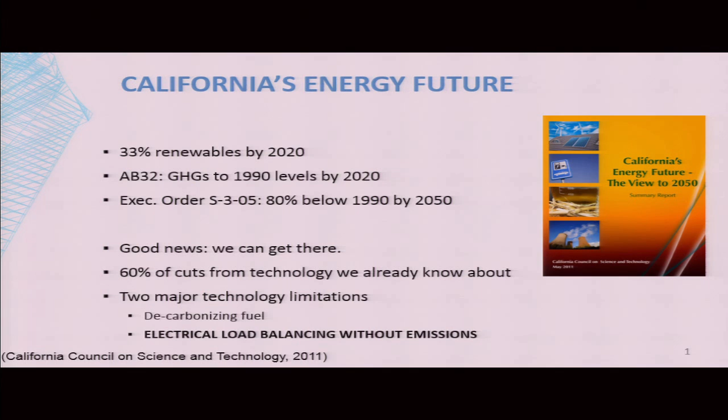So how do we get there? Right now the grid tends to be composed of baseline and dispatchable sources. Baseline sources don't generally turn off, things like coal plants and nuclear plants that produce a constant amount of energy, and it's very expensive to turn them off. Dispatchable sources are things you can turn on and off and control their generation to change the amount of electricity produced, generally things like natural gas plants.

On the load side, you have oblivious loads, things operating on their own control loops or when people request them on demand. All of our industrial, commercial, and residential loads generally fall into this oblivious case where they're just consuming based on a pattern. The communication generally goes one way, in that the grid is just looking at what the loads are consuming, predicting that, and changing its set of generation accordingly.

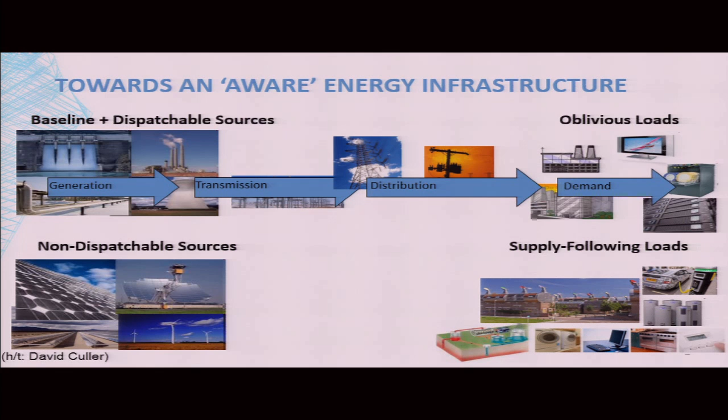So what's changing? As we add a lot more of these non-dispatchable sources—things that aren't able to be directly controlled, so you can't control how much the sun shines or the wind blows, you can just turn them off or on basically—as these become more prevalent on the grid, you get larger fluctuations on the supply side. So there are a few ways to deal with that, but what we propose is a new class of loads called supply-following loads: loads that alter their consumption via communication with the grid, and communication from the grid, in order to decide how they should alter their consumption.

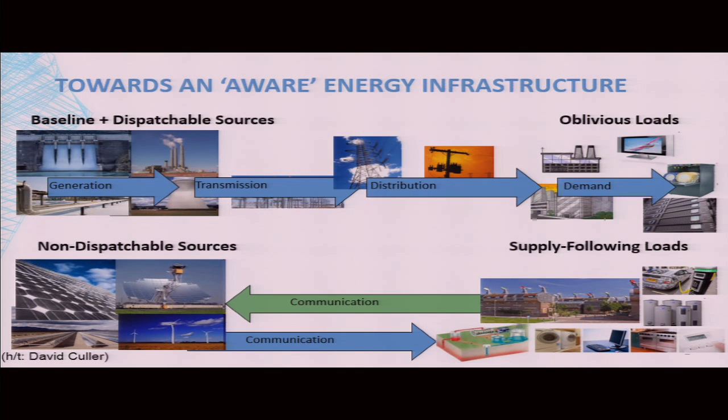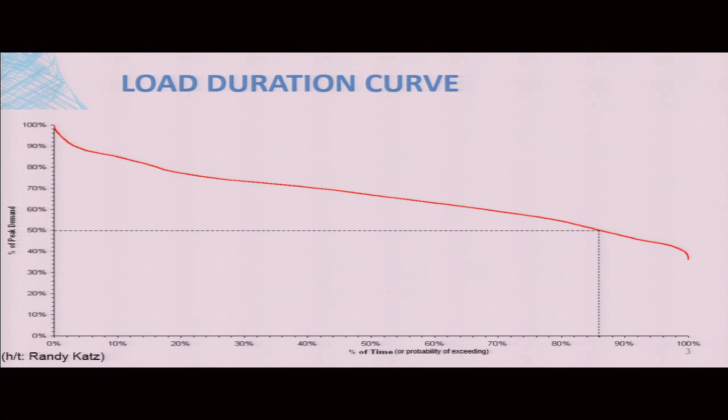What's striking about this load duration curve is that at the top there's a pretty nasty peak. This peak is saying that for a very small number of hours of the year, you're using resources that aren't used any other time during the year. If you break down the types of sources used, those tend to be peaker plants, which are generally the most expensive to operate—otherwise you'd use them at other points on the grid. They tend to have the highest emissions, and they tend to be the lowest capital expenditure but highest operating expenditure for utilities.

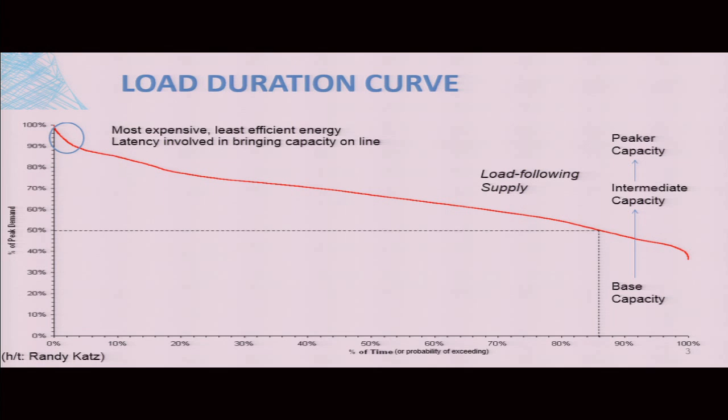So that's why they maintain their role as peaker capacity. It's said that utilities generally spend somewhere on the order of 10% of their generation capital on providing this last 1% of load right at the very peak. So it's a very inefficient part of the curve.

So how is this generally dealt with? There's the field of demand response, documented in I4Energy talks, and there's a great research center at LBL doing fantastic work. Their goal is to essentially incentivize reduced loads during times of peak demand. They try to get consumers of electricity—generally large consumers they can phone up, or increasingly automatic ways to do this at scale—to cut demand at those peak times. In California, these times tend to occur in the middle of summer when there's cooling load from air conditioning in the Central Valley.

Beyond that is demand-side management. This is essentially trying to shift demand not just at these peaks, but also to other places on the duration curve. So it's not just trying to curtail like demand response does, but it's actually trying to relocate that demand.

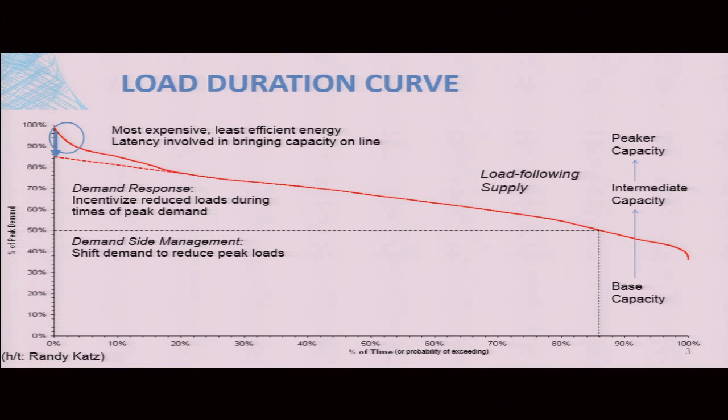And then the set of techniques we're espousing here is supply following—actually having collections of loads that are able to alter their consumption based on a few different characteristics. You look specifically at power proportionality of the loads, how much they're able to change their consumption to reflect the actual work done, as well as exploiting the slack in their load profiles—how flexible the loads are in order to shift and schedule consumption to make this duration curve a little more tractable for a utility to manage.

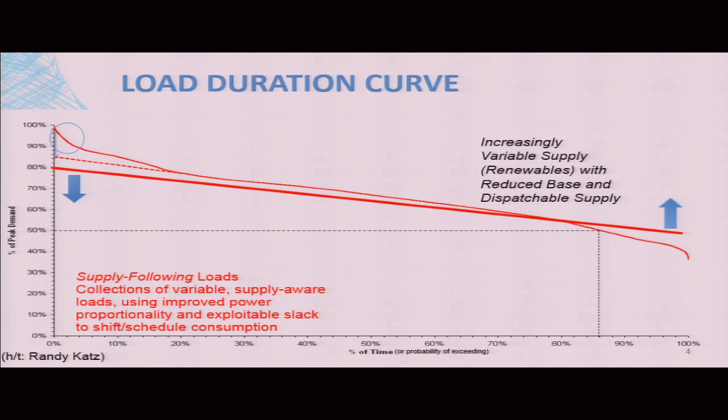So the idea with supply following is that you're not just trying to cut off the peak, you're actually trying to relocate that consumption to elsewhere. You're essentially tipping the balance of this curve so that the energy still gets consumed, but it gets consumed elsewhere. That's where it's different from things like energy efficiency.

One, we'll talk about to what extent supply-following loads can actually help the match between supply and demand. And the other is, how can we actually make existing loads become supply-following? How can we alter loads' consumption patterns to have this nice quality? The other questions I'll address, but only tangentially—if you want answers to those, you'll need to read the dissertation to find out.

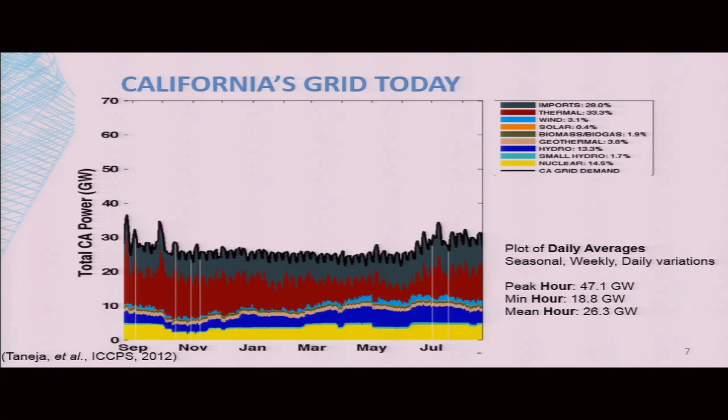So how does this compare to other electricity grids? In the dissertation, I look at three different grids. I look at Germany, which has a far more renewable grid than California does nowadays - it's already at 22% renewable as compared to around 10% for California. But it also uses about 44% coal.

This chart represents the German grid. The top category is actually everything besides wind and solar, so that's not represented on this chart. In Germany, the reason for some of this is that solar has actually been heavily subsidized by the government, and what that results in is that 50% of the renewable investment actually goes to about 20% of the renewable energy - that's the solar portion of the grid, to much consternation of other renewables stakeholders in Germany. As well, Germany has some other considerations like a nuclear phase-out that they're planning to finish by 2022, which will exacerbate the need for, in addition to renewables, techniques to manage those renewables.

Another grid we looked at was Ontario. Ontario is actually quite a different situation because they already have primarily carbon-free generation. They get 78% of their generation from hydro and nuclear sources, and only a small remaining 3% from about a gigawatt and a half of wind capacity. There's no utility-scale solar in Ontario. So one of the things I'm answering is how these decisions came about and whether they make sense from an energy perspective, regardless of the actual policy concerned, for example, not having any utility-scale solar.

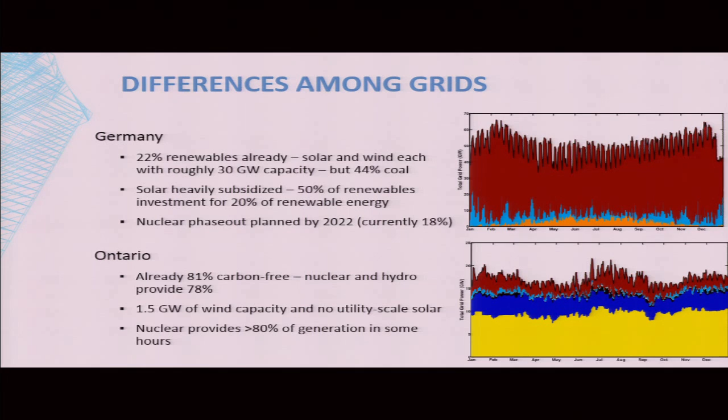That's important because if you're able to make other loads more efficient, or you have to cut back, or try to increase your nuclear proportion, you might have times where it's required that you turn off nuclear plants. That's very bad for the operation model of nuclear plants and for the economics. So what we might see as we get rid of remaining fossil fuels on this grid is quite a change in its generation mix.

So we'll drill into California to understand some implications of going to higher levels of renewables. The experiment we wanted to undertake was looking at renewables in the behavior of the electricity grid at a far more renewable level—not just the 33% we're looking at in 2020, but going well beyond that. So we targeted 60%, and the reason for 60% is that's when you start to see really interesting behavior.

We also see that the importance of techniques like demand response, demand-side management, and supply-following loads really increases as the penetration goes up. So we aim to look at a grid that was 60% renewable.

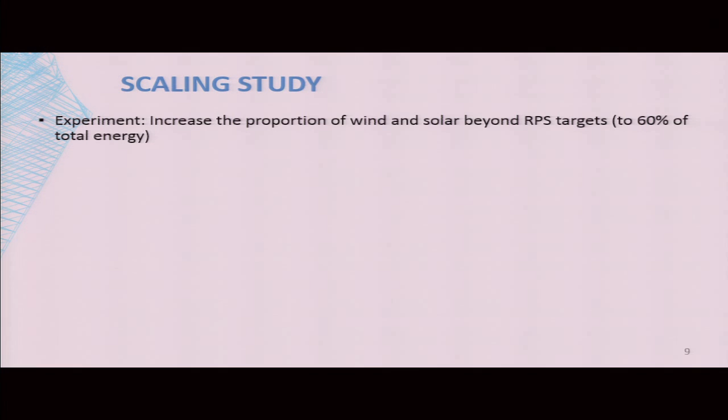In order to do a study like this, we had to make a number of assumptions. Among those, we maintain the existing population of wind and solar facilities, and we scale up their generation proportionally. What that essentially does is maintain the same temporal and weather patterns that affect production. To size them, we figure out what size we'd need for a specific proportion of renewable energy, then try to minimize the total capacity of resources needed to get there—essentially attempting to minimize the cost of achieving 60% renewables.

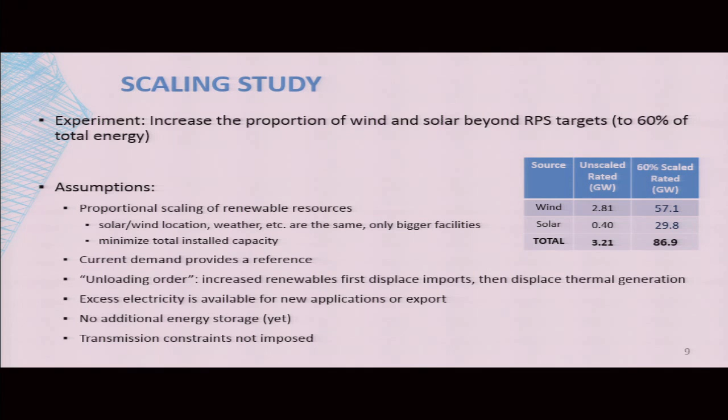As we increase renewables, we're also displacing other energy sources. The order we've chosen is to first displace imported energy, then displace thermal natural gas generation. So at times when there's renewable electricity production beyond the reference demand from our current demand, we have excess electricity—you'll see in the next chart how that operates. We're not considering any additional energy storage beyond what's on the grid now, and we're not worrying about transmission constraints at this stage of the study.

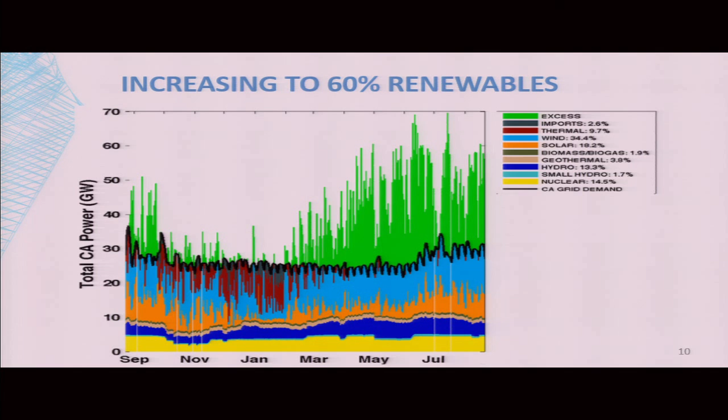This is the same chart I showed you earlier for the current California grid, but notice how this changes as we ramp up to 60% renewable. We've really increased solar and wind, going from about 3.2 gigawatts to about 87 gigawatts of capacity. We've displaced a lot of the thermal and imported generation, now somewhere around 10 or 11%. We didn't alter hydro, nuclear, and other baseload elements in this analysis.

A few things jump out immediately from this graph. Right now we're operating mostly concerned about summer in the current grid today, because that's when our peak load occurs and we need to use the most resources. In this situation, that's no longer the case—we no longer have that cooling crunch in the middle of summer when everyone turns on air conditioners, because just as nature intended, that's when energy is most abundant. That's when the sun is shining brightest, there's a lot of wind energy available, and we have copious amounts of excess.

At the same time, winter becomes the toughest in this scenario, because the change in available energy from the environment is much larger than the change shown in demand. We actually end up using a lot of our fuel reserves in winter—turning on natural gas plants and aggressively using fuel resources. But on the periphery, in these shoulder seasons, we have intermittent excess and deficit where we could use load shifting and supply shifting techniques to address being excess in the middle of the day and deficit at night.

So what does that actually look like?

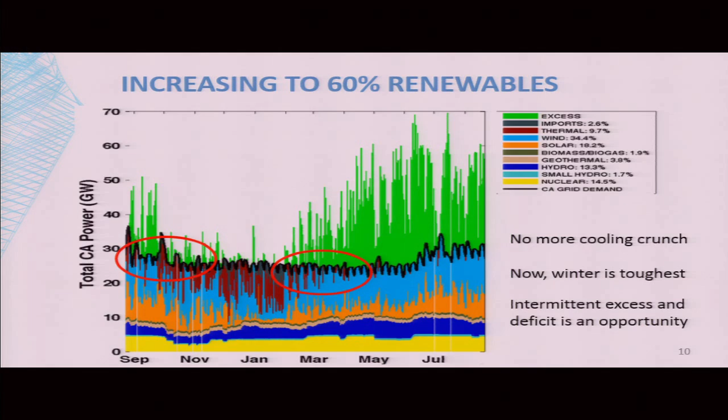This is a 5-day period in the autumn season, and it shows that pattern I just described of having excess in the middle of the day when there's a lot of solar electricity available, and then deficit in the middle of the night. You can see that at some points, like on this third day, there's quite a bit of deficit that we end up dipping into our thermal resource as well as our imported resource in order to meet demand, this reference black demand.

So how could we imagine dealing with this and trying to improve the match between supply and demand, as well as cut down on emissions?

First we could imagine using some of our supply-side resources. We see this hydro resource, this blue resource here at the bottom, and its current management results in it generally matching the overall demand curve, this black line. The shape of it is very similar to the hydro, and that's a reflection of how these resources are managed now. We can imagine that since our goal is no longer to match demand, because we have excesses at some times, it could be an altered goal to try and displace our fossil fuel needs at other times of day. So we can imagine managing this resource differently, and I'll come back to that later.

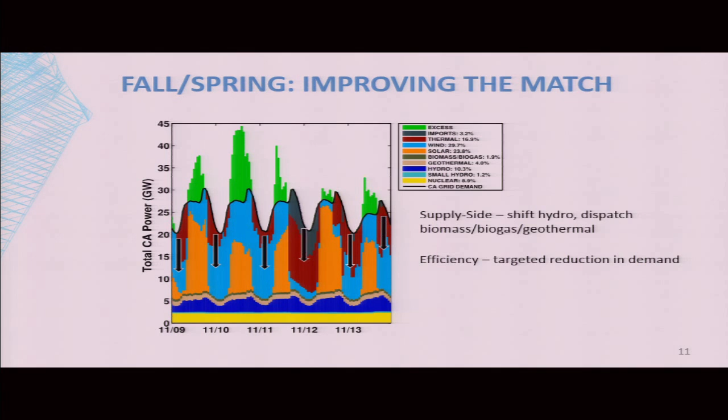Another solution we can imagine is targeting our efficiency. There's all sorts of work going on in energy efficiency. It's an age-old topic, and it's one that is critically important to improving this match, but we can target which types of energy efficiency we perform. What classes of loads make sense? Which loads are the ones that are consuming energy in these times of deficit?

Next, we can imagine utility-scale energy storage, and this is one that has been held up for a long time, and there's lots of great research on the topic, but it still hasn't grown to large utility scale yet. Essentially what you're doing is you're shifting periods of excess supply into times where you might have deficits. So you can imagine taking each of these green excess peaks and pushing them down into the valleys when we're using fossil fuels otherwise, with large reservoirs of storage.

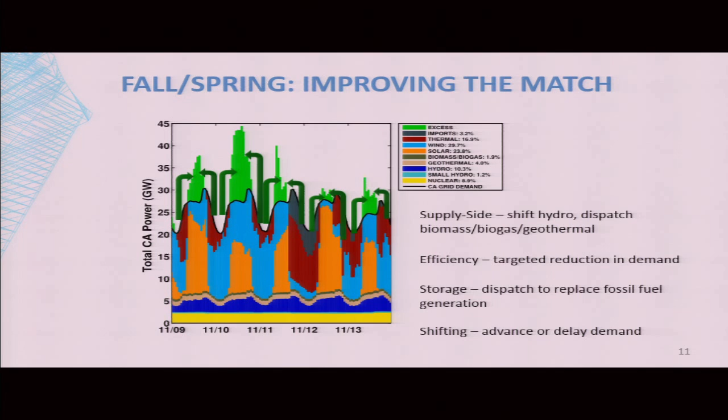And last, you can imagine energy shifting. The value here is you can actually shift in both directions. You can take load from times where you would have been consuming fossil energy and move it to times where you have excess energy available. You can advance it, so you run it earlier than it normally would have, or you can delay it and run it later than it actually would have. This is the one we'll dig into first.

So now that we have a grid perspective of what's going on, I'm going to jump into a micro perspective and look at what actually happens with supply following loads and how we can implement them and understand their performance.

As part of the study, we've implemented 3 supply following loads. But there are some considerations that are important when looking at what it means to make a load supply following. Some of the key ideas here are looking at agility, how quickly the load can change its consumption. If you think of it as the notion of a battery, it essentially reflects power delivery and frequency of operation — how often you can use that electricity load.

The other one is proportionality. This is essentially categorizing how well a load's consumption reflects how much work is done. Loads that don't change from day to night, like a building heating or air conditioning system that doesn't change its consumption much from day to night, is said to be not very power proportional. But if it were able to change its consumption largely, then it would be quite power proportional. So what this power proportionality characteristic represents is how much you can flex that load, how much slack there is in that load's temporal profile.

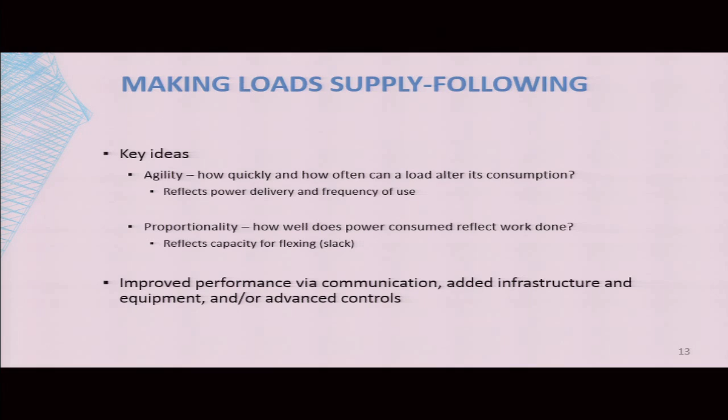In cataloging each of these 3 supply following loads that I've built, we look at improving the performance of the device for supply following using 3 main techniques. One is adding communication so that the load is aware of what's going on outside of its local operation. We add infrastructure equipment so that it's able to be more supply following. And last, we imagine using advanced controls and how we can change the software around how a load operates in order to change its consumption behavior. We can imagine using families of these techniques all together.

The first supply following load that I'll introduce is actually a heater.

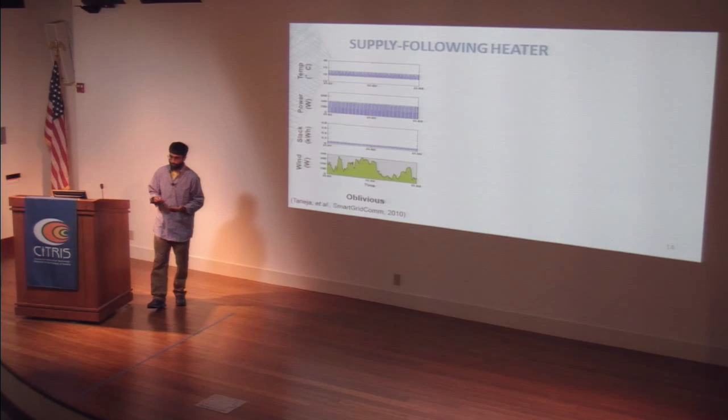This is an empirical model. There was a cycle of a heater in my advisor's home that I used the data for to understand the temperature behavior. This is the top plot, and then the power behavior. We use that cycle to build a model so that we can alter its operation and understand how it might change its consumption accordingly.

In the third row here, we're looking at slack. This is essentially an energy measure of how much flexibility there is at any point in its operating pattern, and this has to do with some of the constraints in the control of the device. You can see in this top chart there's a temperature boundary, a guard band, that we're trying to maintain. As you traverse through that guard band, the slack available to you changes.

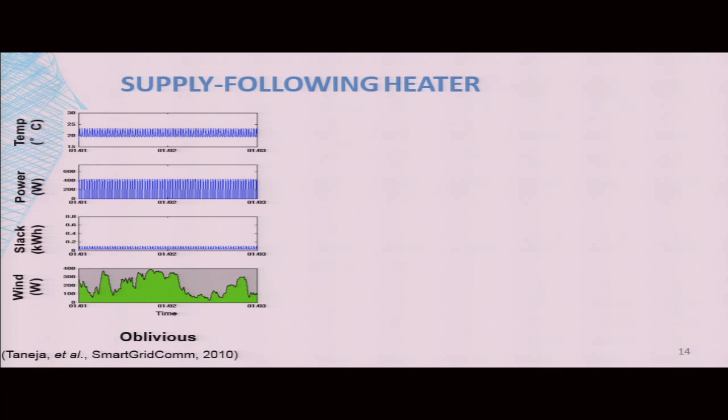On this last pane is a wind trace that's sized to provide 50% of the energy that would be needed by this heater. In this first column, this is an oblivious load, so this load isn't considering what's going on with the supply. On this bottom graph, it's just operating given its local constraints.

The next column represents a supply following load that we call supercooling. Essentially what it's doing is widening the guard band so that in periods where there is a deficit of renewable electricity—you notice now in this bottom chart we've added a red dashed line—when we're below that threshold in supply, we change the operation so that we allow the room to get cooler. We allow it to naturally cool for longer, and that allows us to limit the number of cycles that occur in those times.

So we have periods of more dense activity and periods of more sparse activity, and these cycles, though fewer, tend to be a little bit longer. We also see that during those times, we increase our slack so that we're able to traverse a larger amount of flexed energy. The third strategy we tried is what we call a wide guard band supply following strategy.

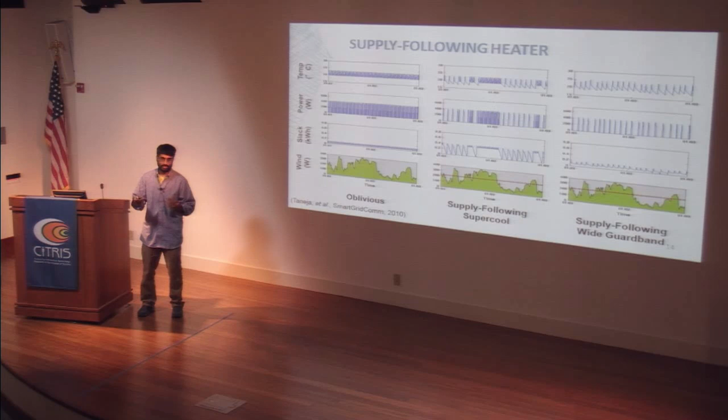It takes the same principle on the lower edge of the guard band as the previous one, but it also increases the higher edge of the guard band. What that essentially says is that when there are periods of excess wind in this bottom chart, you operate by letting the heater run for longer. So you oscillate between situations where you run the heater for longer and where you try to avoid using the heater. That results in increased slack—it changes the slack portfolio, and it actually makes the cycles a lot more sparse relative to the operation of the other heaters.

So how does this heater perform? What we see here is a breakdown of the energy, and what jumps out immediately is that the supply-following heaters actually reduce consumption quite a bit. The reason for that is that you're not providing the same level of service. By widening the guard band—just as we see in buildings, and the Center for the Built Environment has talked about for many years—you can widen the guard band, reduce the level of service somewhat, and really save a lot of energy. But that's not what's critically important here.

What we're looking to do is manage this breakdown between renewable and non-renewable energy. In our oblivious case, it was sized to provide 50% of the energy from our wind turbine. In the supercooling case, we're actually able to provide 60% of our energy from the attached renewable source, and slightly less in the wide guard band case.

The reason it's actually slightly less is that as you run the heater for longer, in those periods where you're running it for an extended amount of time, it runs more efficiently and changes the temperature more efficiently. By running more cycles in those times, in the supercooling case you're able to consume more electricity during the renewable periods, and that shifts this balance slightly more towards the renewable side in the supercooling case than in the wide guard band case.

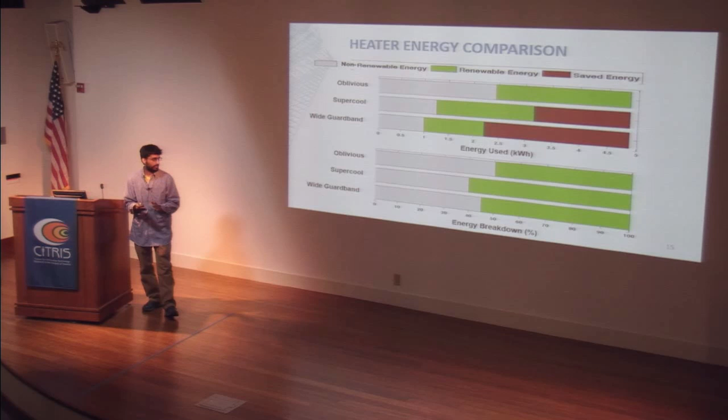But that's still not the most important thing here. This is a fairly modest gain—only 10% relative to the oblivious case. But when you think about the energy consumption pattern of these devices, it's fairly spiky.

And so what happens is that by having these spikes of fridges using power, and imagining if you have other fridges doing the exact same thing, you get this very nice statistical multiplexing behavior.

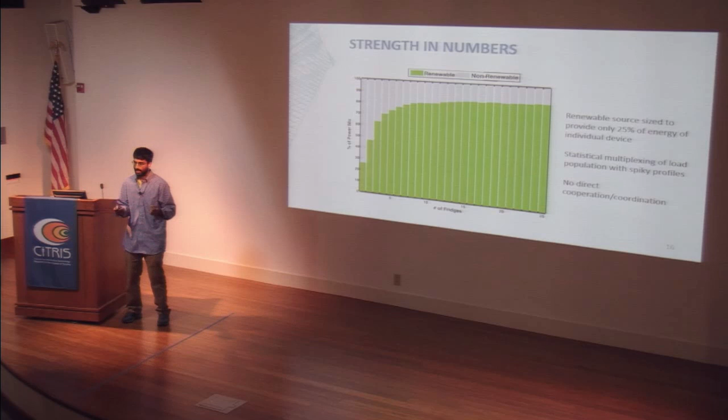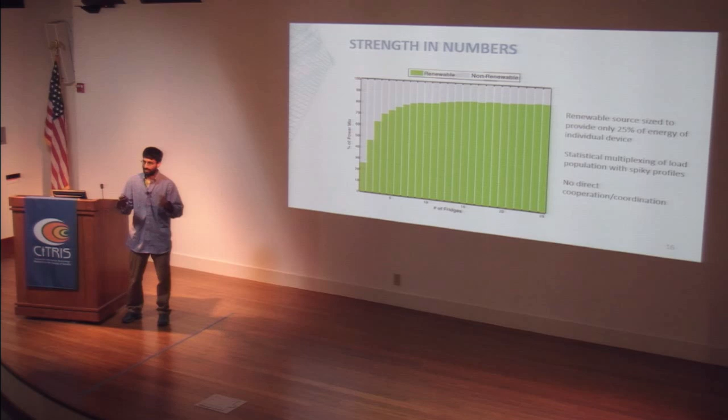So this really works well when you have these spiky profiles of consumption. But what's also important to notice is that there's no actual direct communication or coordination among these fridges. They're all looking at signals from the grid and deciding how they should consume their electricity accordingly. So there's no actual communication, just one-way communication with a little bit of information technology added on to the control of the device.

So our next supply following load is what we notice is that in our refrigerator case, there isn't very much thermal storage. There isn't very much slack provided by these loads. If you change the consumption pattern of a normal refrigerator, you can't change it by more than a few minutes without reaching the edge of your guard band and having to consume electricity again.

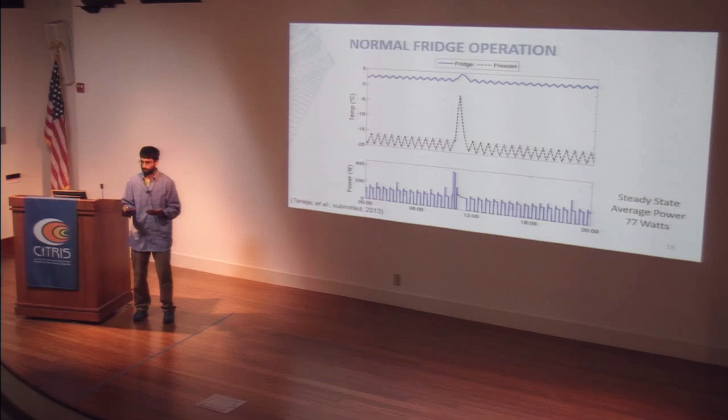And so what we aim to do with this is actually improve the thermal storage characteristics of a refrigerator. Looking at the operation of a refrigerator, this is empirical data from a refrigerator that is typical of one found in a residential setting.

What we see on the top chart is temperature of the refrigerator compartment and the freezer compartment in black, and the refrigerator compartment in blue. In the middle, that spike is actually the defrost cycle. They generally happen once or twice a day, depending on the device, and it's meant to remove frost from the evaporator coil. On the bottom chart, we see the power of the entire unit.

You see that on the defrost cycle, there's quite a bit more power used, but for a very short amount of time. Generally the cycles are fairly regular. So this is the operation of a normal, unmodified refrigerator, and you'll see it uses about 77 watts in its steady state power. Remember that number, we'll come back to it in just a bit.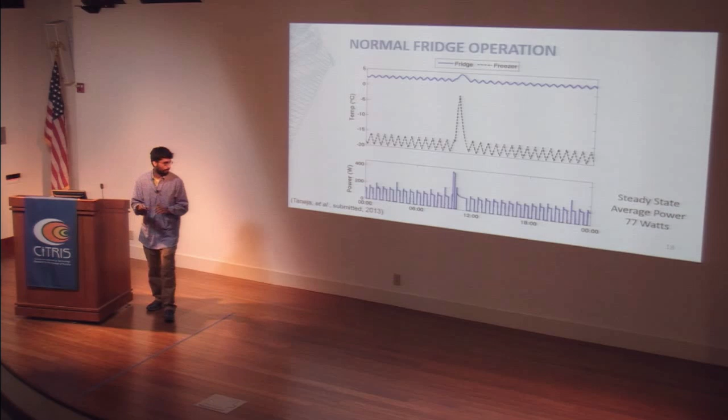So the way we actually altered a refrigerator was to add a thermal storage element to the freezer. This is a picture of the freezer of the device. It's a prototype, so there's lots of wires, communication, sensors, and other things. But what we've added here is actually a thermal storage element, essentially a tank. It's a stainless steel tank that has a phase change material in it.

What's really important is that this phase change material is specifically chosen. It's ammonium chloride at a specific concentration such that it freezes at around minus 15.5 degrees Celsius. The freezer operation generally runs below that level, below minus 15.5 degrees Celsius, so that in operation, it's constantly frozen.

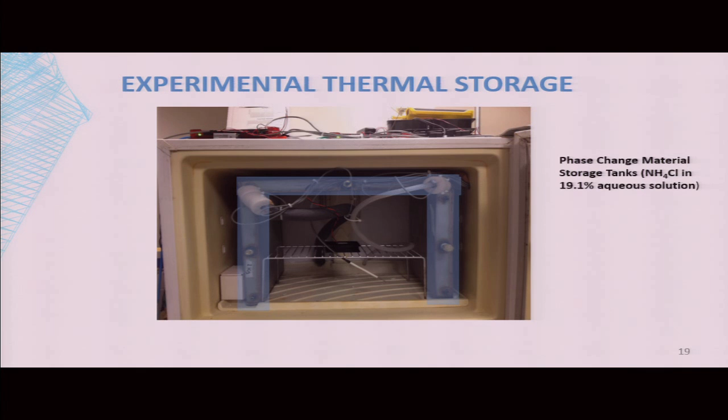But if we want to melt that device, we just cut off the power from the compressor, and we allow the heat to be captured by the ice battery, so we don't allow the air temperature in the freezer to actually increase. There's roughly 6 kilograms of salt in solution inside these 3 tanks.

As well, beyond that, we have tubing, and since we're cutting off the power to the compressor, we're actually also cutting off the fan that blows air from the freezer to the refrigerator. So what essentially is happening is we need something to be able to remove heat from the refrigerator. We have this tubing that runs through the tanks as well as through the refrigerator compartment, and it's connected to a pump that's outside.

And this tubing allows you to remove heat from the refrigerator. Inside the tubing is a propylene glycol-based solution that freezes at a level like minus 35 degrees Celsius, so it's not going to freeze in our normal operation. It allows us to remove heat from the refrigerator compartment.

And last, we have a fan that helps with convection so that we get nicer freezing and melting properties inside our freezer. I want to stress that as this is a prototype, this isn't exactly how you'd build it. You wouldn't cut down on space in the freezer—you'd probably integrate these things into the actual commodity device, the refrigerator. But for the sake of proof of concept, we've tested and run with this operation.

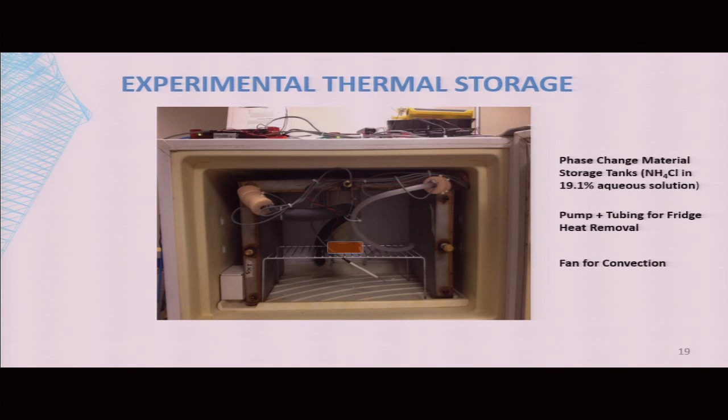So what does it look like? Well, this is the operation of a thermal storage refrigerator. It's the same chart as before, so it's over a fridge operation over a day, but there's now a new line. This black line represents the temperature of the thermal storage element, the ice battery as we call it. And what you see is that since it's a larger thermal mass, it doesn't oscillate as much as the air in the freezer.

So the oscillations per cycle are much smaller. As well, that minus 15.5 degrees Celsius freezing point, the phase change point, it actually asymptotically approaches it while the ice battery is absorbing energy. And what's also important is that you see the temperature changes quite quickly in the regime below minus 15.5 degrees—that's sensible heat, just the result of the delta T, the change in temperature.

But the phase change, the heat involved in the phase change, is actually much larger. So you're able to capture quite a bit more energy going across this phase change boundary. And that's why it's critically important that we use a phase change material there.

What we also see is that the steady state average power is increased by about 10 watts. It went from 77 in the non-modified case to 87 watts in this case, so it's about a 13% increase. We imagine that if we actually commoditize this design, it would be quite a bit lower—we'd use a better pump and a better fan, lower power that would be sized correctly, more appropriately, and be able to get this number closer to the operation of the normal refrigerator.

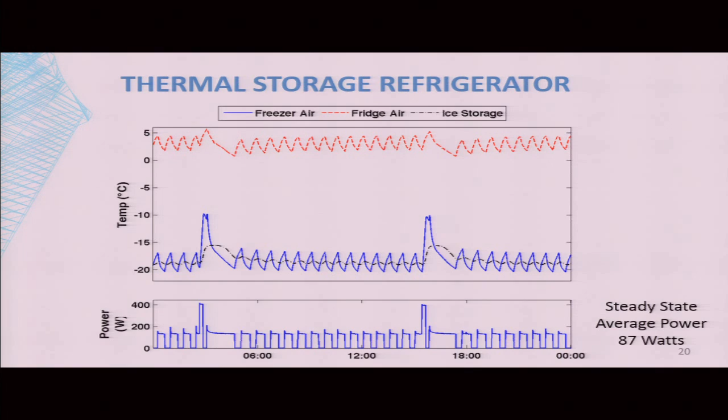So how does this perform in a supply following case? This is a chart that shows 3 days of operation of this fridge operating in supply following mode. It's the same chart as before with temperature on top and power below it. But then below that, we actually have a supply power signal from the California ISO—this is the total number of renewables available in California. You can see it oscillate from anywhere from about 2.5 to 3 gigawatts, all the way up to almost 6 gigawatts at its peak, and each of the colors here represents different states.

So all we're doing is a very simple threshold. We have a state where there's low renewable power availability in red, medium power availability in tan, and high power availability in green. And in each of these states, the control algorithm we use for the fridge is different.

In the low power availability case, we're trying to avoid power consumption, so we actually maintain a higher temperature guard band. What that allows us to do, as you can see in the last pane here, is melt the ice battery in order to provide that same cooling functionality that the compressor would provide otherwise. Essentially, it makes us require fewer compressor cycles during that period.

In the medium availability case, we just operate the fridge as it would normally operate, so we don't change its control pattern. In the high availability case, this green case, we keep a tighter guard band, which causes more consumption so that we charge the battery somewhat faster when there's a surplus of renewables available. You see there's quite a larger number of cycles in these periods of high renewable availability. The result is this kind of stratified operation between low supply, medium supply, and high supply, anywhere from 50 watts to about 80 watts.

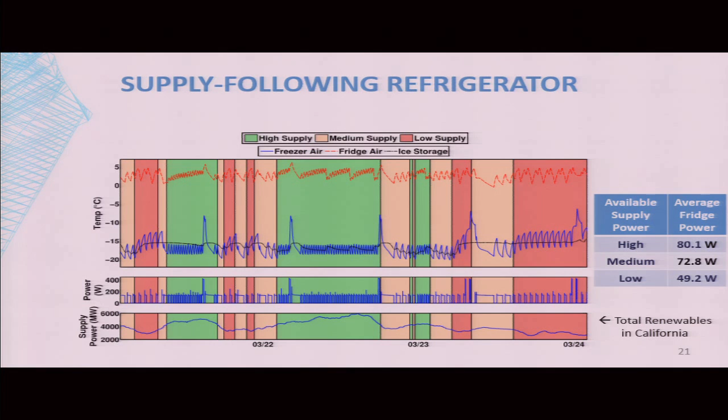The next question we sought to answer was: now that we have these supply-following refrigerators, what would they look like over the scale of the entire grid? This slide attempts to answer that by looking at the duration curve, same idea as last time, but instead of overall demand, we're now looking at just the natural gas proportion of the supply mix, specifically the penetration of supply-following fridges in California.

This is the base case, our 60% renewable grid, and this is the natural gas duration curve with no supply-following refrigerators. We can see that 65% of the time, natural gas generation is not used - that's what this point on the x-axis represents. But we have this nasty curve at the far left, just like with overall demand, and here it might be even nastier. For the top category, 9 hours of the year, we're using almost 3 gigawatts of capacity, which is 15% of our overall capacity for those 9 hours.

So what we'd like to do with our supply-following fridges is target that max and try to bring down that peak. But it's not the max of the overall load duration curve - now it's the max of specifically the natural gas generators, so we can run those generators much more cleanly from a utility perspective.

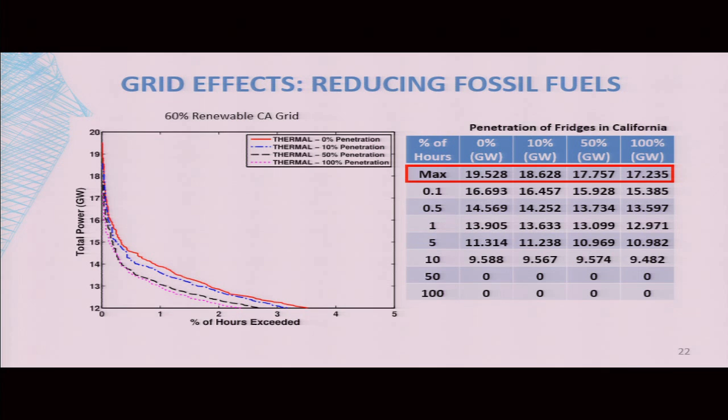As you amp up to 50% and 100%, you start getting 2-3 gigawatts. These are large numbers from just changing refrigerators to supply-following, and you could imagine using this technique in addition to others like demand response. If you could shave off the top 9 hours using a different technique, you could get down to 15.5 gigawatts - a full 4 gigawatts, 20% of the original capacity needed, just by employing these two techniques across the grid.

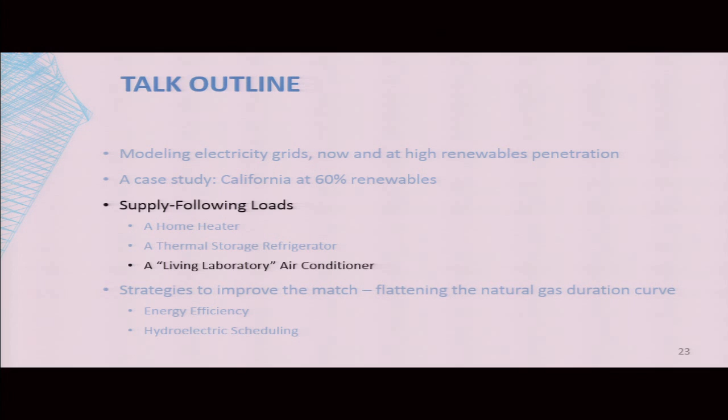Our final supply-following load is a living laboratory air conditioner. What's important here is we took a computer lab - actually a computer lab on the first floor of Cory Hall, room 199, an undergraduate computing lab used mostly for homework. There are occasional classes held there, but it's used intermittently and changes throughout the term. It has roughly 15 computer terminals, and what we added was a networked thermostat.

We changed the thermostat so it could be actuated remotely, and built a model of how the cooling and heating dynamics in this room work, as well as a system that allowed us to run a control algorithm elsewhere to change the operation of the thermostat and thus the air conditioner accordingly.

To build this, we used the sMAP system - I believe there's been an i4Energy talk before about sMAP - essentially a data warehouse, a way to fuse different kinds of data sources to run applications and make use of energy data. In this case, we used energy data and weather forecast data to make decisions in our control algorithm affecting the operation of the heating and cooling system in this room.

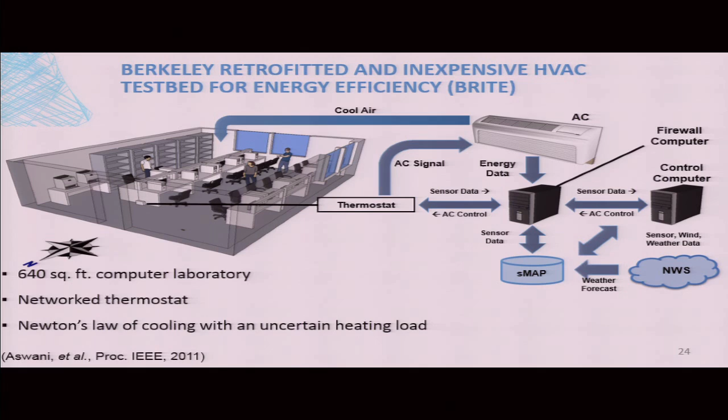What's important in energy efficient HVAC is that you have this uncertain heating load caused by the presence of equipment changing its power consumption based on whether people are using it, and then the people themselves coming in. We're all 75-watt light bulbs, so we're all consuming some amount of power, and we're creating heat accordingly, and that heat is reflected in how the operation of the room goes.

As well, in that uncertain heating load, during the nighttime period there's very little cycling needed by the air conditioner because there's less heating load in the room, so we don't actually need that compressor. So we have this uncertain time-varying heating load, as well as somewhat complex energy characteristics. Turning the compressor on produces a transient that consumes more power for a short time, just like any motor would. We need to consider that in our control algorithm so that we minimize the number of cycles running this compressor, as it's least efficient right in that early stage when it's using a lot of power.

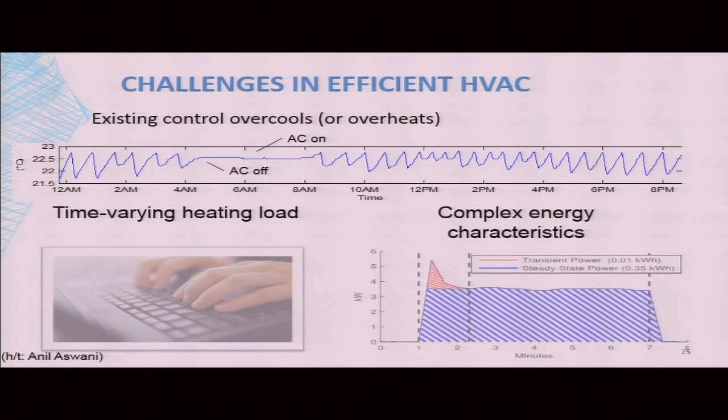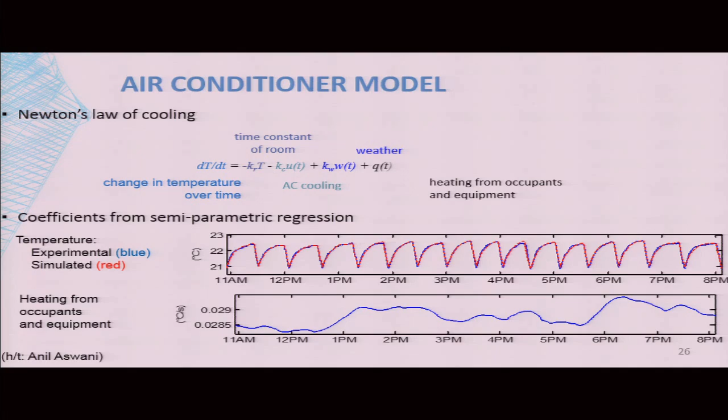So what we did in order to model this room - this is a more advanced controls technique that we employed - is we built a model constructed on Newton's law of cooling. Essentially the pieces here are: there's heating from a bunch of different sources, there's the time constant of the room, there's a reflection of the air conditioner and its behavior, there's a reflection of the weather and how much solar gain there might be through the two windows - there's two sides of the room that have windows - and then there's this last term, which is the uncertain heating term.

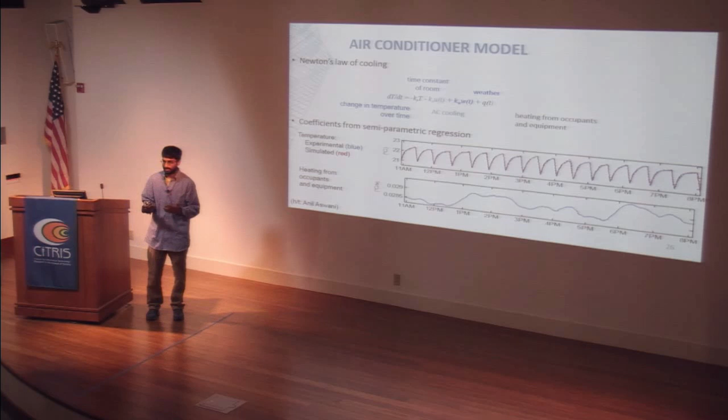Each of these terms has a parameter attached to it, and we identified these parameters using a semi-parametric regression technique - details can be found in the dissertation. But essentially the result is that we're able to build a model that's faithful to the operation of the system. What's really nice is because we have knowledge of what these first three terms are in the model, we can at any point in time pull out the term that reflects this uncertain heating and equipment.

So in this bottom graph we have something that represents the heating from occupants and equipment. It's a measurement of occupancy that's derived indirectly only from a temperature sensor, which is a very useful thing to have.

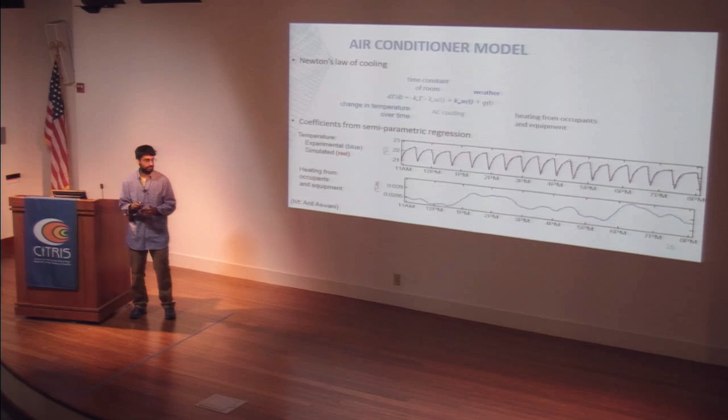Some of what we use in order to employ this model is what's called learning-based model predictive control. This is a technique developed by a colleague, Anil Aswani, in the electrical engineering department. What we use this model predictive control for is essentially a special variant that uses two different models rather than a single model for its control, and these two different models have different capabilities.

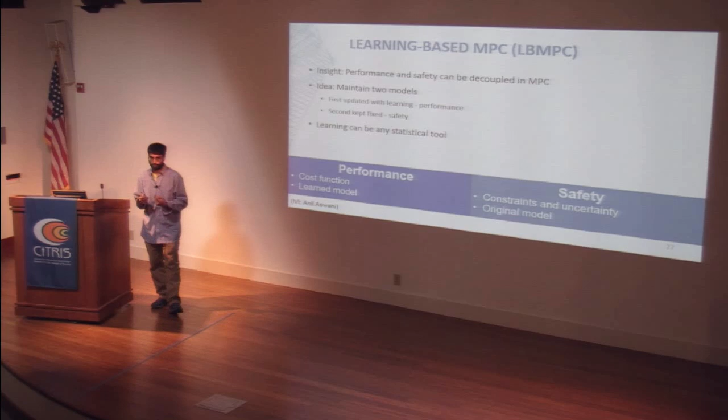One is your performance model, the model that learns and allows you to get better. It can employ any kind of statistical tool to get better, but it's constantly trying to push the boundary and improve performance. As well, since we have a safety constraint in this room, we have a separate model that's essentially the baseline model that doesn't change over time with learning, and it represents the constraints - for example, the constraints might be to maintain temperature between this level and this level, or try to maintain supply between this level and this level, or so on. It doesn't change over time.

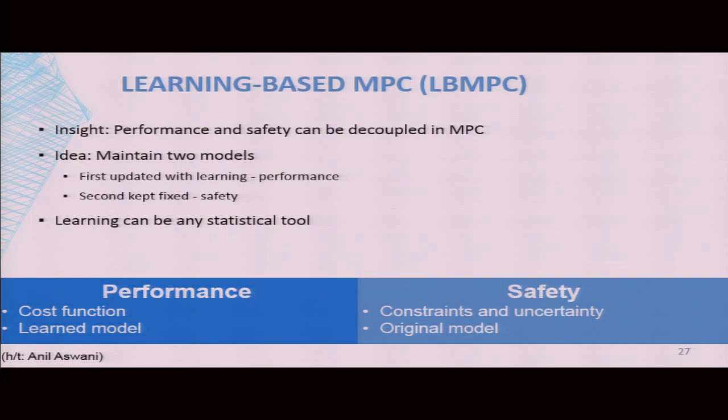Using this learning-based model predictive control technique, we controlled the room for a number of different days. What's interesting about this room is that it's a living laboratory, in use by students constantly. So we're not able to do fully controlled experiments with the same inputs using two different control sequences, because the weather, equipment, and occupant inputs are changing. So what we do to address that is run our two different control scenarios, but at the same time use the exact same inputs and our model to run the opposite scenario.

For example, we run the thermostat controller, but then simulate the learning-based model predictive control using the exact same input, so we can see how that system would have done in the same scenario. This is a consideration we had to make because it's a living laboratory, and those inputs are changing. So in both cases, we ran the thermostat controller and then simulated the learning-based model predictive controller, and then switched it around, running the learning-based controller and simulating the thermostat. This occurs on different days, different inputs, different weather, so the results reflect that.

What we actually found is that we're able to get quite a bit of energy savings, 30 to 70% energy savings. That's a function of the weather and the usage of the room and everything else, so there's quite a wide range of possible benefit there. But from a supply following context, what this gets you is the bleeding edge - this is as efficient as you can possibly be. So in a supply following context where you're trying to match a supply that's non-zero, you can get as efficient as this. You might be less efficient, but this essentially represents how flexible your load is, how much slack there is in this load. And it's quite a large number, up to 70%.

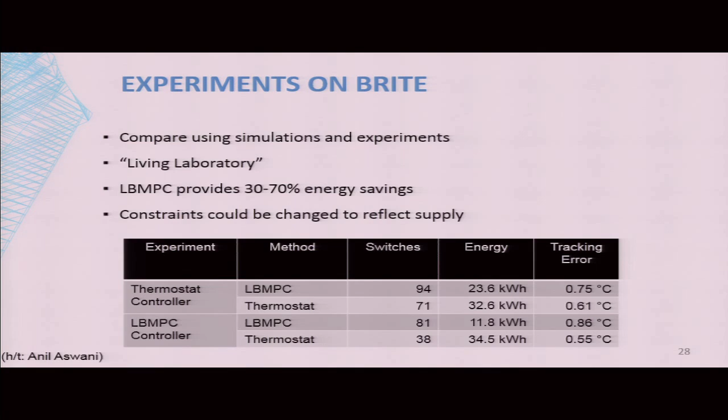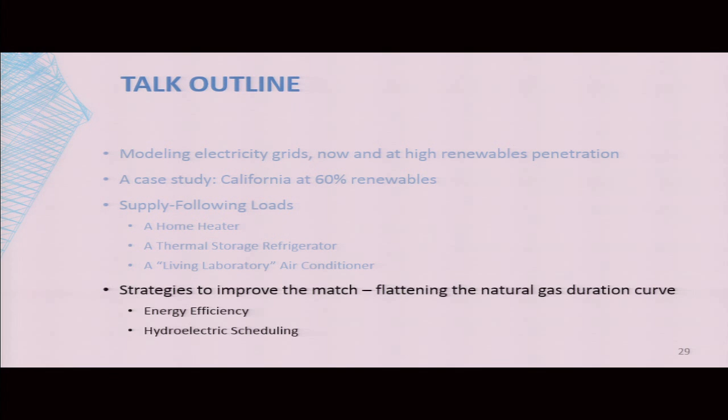Now that we've looked at a few different kinds of supply following loads, I want to discuss some other strategies you might use to improve the match between supply and demand on grids that are highly renewable.

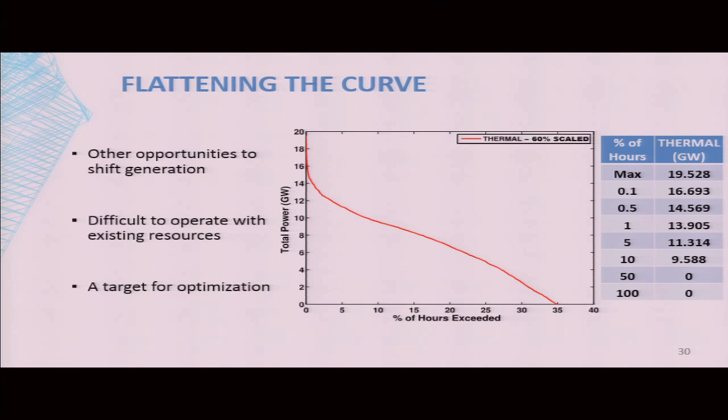As we noted in the thermal storage refrigerator work, what you're targeting in these cases is no longer the overall load duration curve, but actually just the natural gas curve. So this is that same load duration curve again, with its very peak, prior to using any supply following load on this. An important characteristic of this curve is that it's very difficult to operate with existing resources - you have pretty massive changes in generation expected of the natural gas resources. So we'd like to flatten this so that the natural gas resources are used somewhat uniformly and evenly, so we're not constantly dispatching and making use of that difficult transition. This is actually a really nice target for optimization.

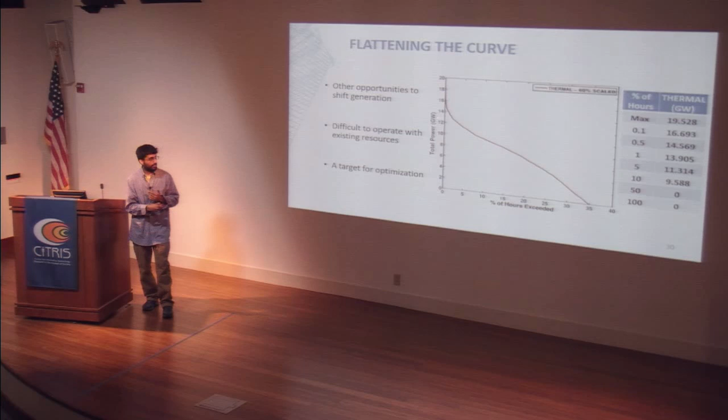What we're trying to do is flatten this peak. So how might we do that? Well, one approach I mentioned earlier is targeted energy efficiency. You can imagine that for each kind of electricity load, there's a certain pattern with how it consumes electricity. Likewise, for each kind of generation, there's a certain pattern with how it's been used to provide electricity. In the case of our 60% grid, there's a certain pattern that falls out for how the natural gas generation is used. So what I've done here is taken 13 classes of loads from the California Commercial End Use Survey - these are all commercial load classes.

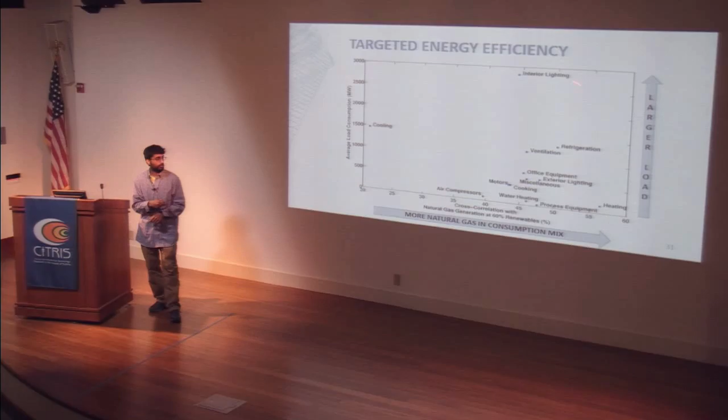I've done a cross-correlation of their time series, looking at when they consume electricity, and compared that to a cross-correlation with the generation of natural gas. So by traversing this x-axis, as you go higher, you're looking at loads that have more natural gas in their consumption mix - they're consuming more energy generated from natural gas. The other axis is just the average load consumption of that class, so you can get an idea of how big these loads are relative to each other. Ideally, where you'd like to be focusing your energy efficiency work, where you'll get the most bang for the buck from a perspective of reducing natural gas, is up in this top right corner.

So interior lighting, for example, and starting to look at refrigeration and things like that. But what's also important is where you get the least bang for the buck.

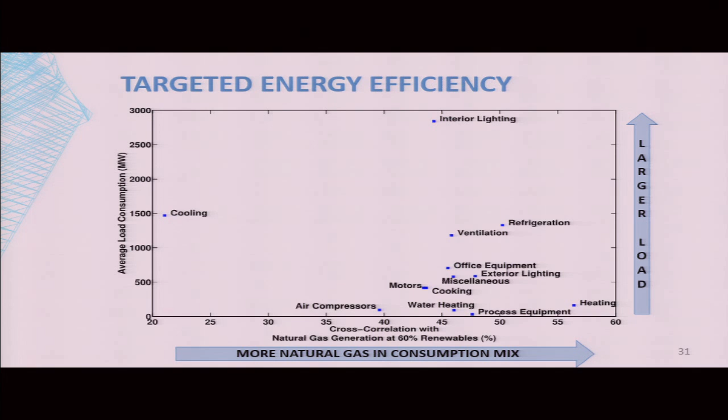All the way over here at the left by itself is cooling. That low correlation reflects what we can intuit from our graph: cooling generally occurs during the middle of the day. When we have lots of renewables, we're no longer constrained in the middle of the day—we've gotten rid of our cooling crunch. So in this kind of scenario, we don't need to focus our efficiency efforts on cooling. In fact, it makes a lot more sense to focus it in other areas.

Another way we can address this mismatch in supply and demand is looking at hydroelectricity, which I mentioned earlier. What we can do is modify supply-side resources now that we know how the demand is changing. Looking at hydroelectricity in the grid today, it's the largest source of energy storage—the largest reservoir of energy storage we have.

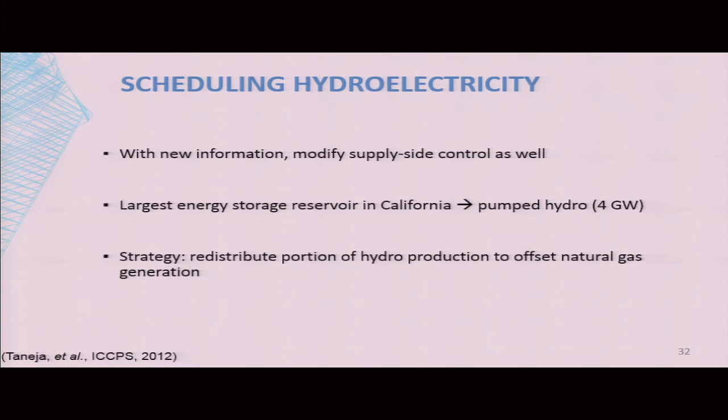Essentially what's happening now is we have lots of these pumped hydro facilities, about 4 gigawatts of capacity, with reservoirs at different levels in the mountains. We pump water up at nighttime and release it through turbines during the day to produce electricity at times when it's more expensive. Our strategy is to change that from night to day, targeting not the overall demand curve, but the natural gas duration curve.

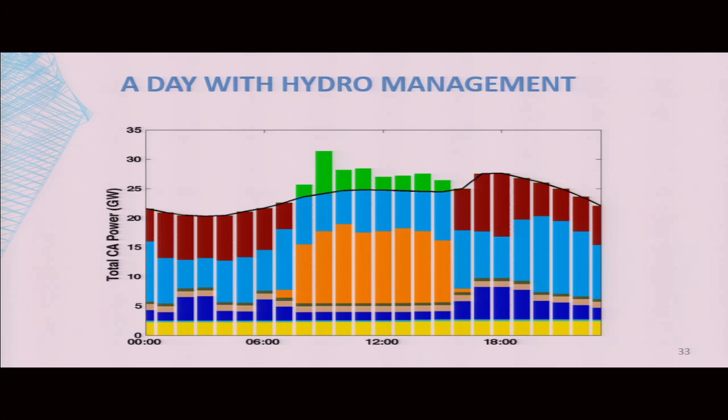So there isn't much we can do to alter this problem we have in the winter where we're using lots of fuels. Whereas in the summer, we have quite a bit of ability to use this.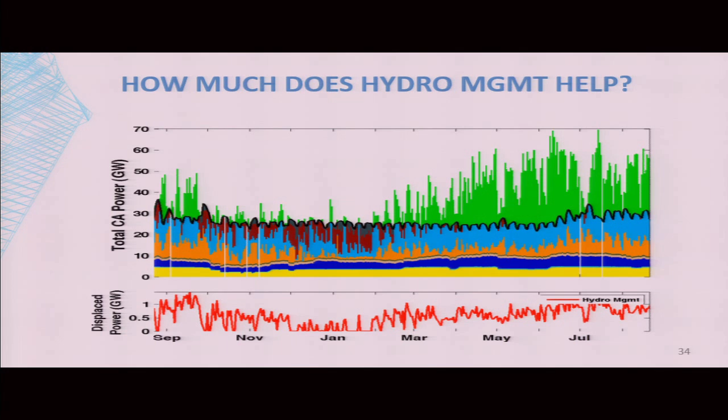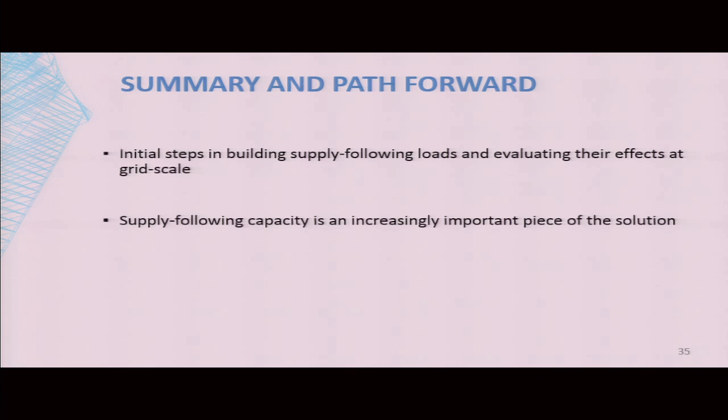I want to conclude and talk about the path forward in this research. What I've shown are some initial steps in building supply-following loads and evaluating them at grid scale, understanding what their role could be at different levels of penetration on different grids. Supply-following capacity is increasingly important as you change the consumption patterns of the grid, as we add renewables and fundamentally alter the problem of supply and demand matching. Having these tools at the disposal of grid operators and consumers is critical to maintaining reliable electricity.

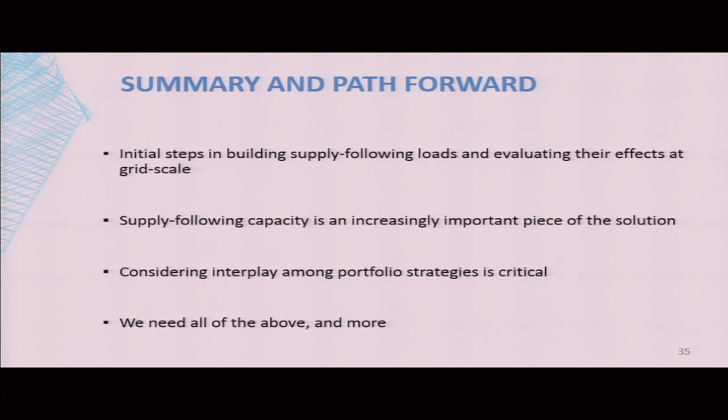It's really important to consider the interplay among these things. I showed that hydro chart at the end, and that's pretty telling—it matters when you apply these strategies and which ones you apply in concert. But the big takeaway is that we need all of the above. It's a very difficult problem to make that thermal generation go away, and when it's here, to use it effectively and appropriately. We need to use all of these strategies in concert, and even more.